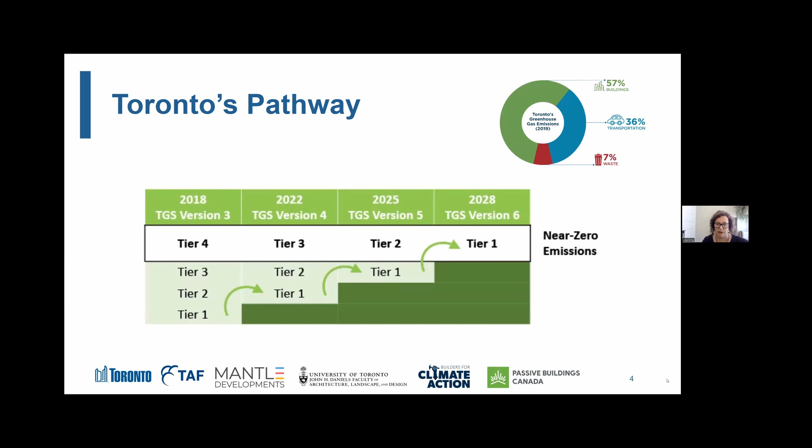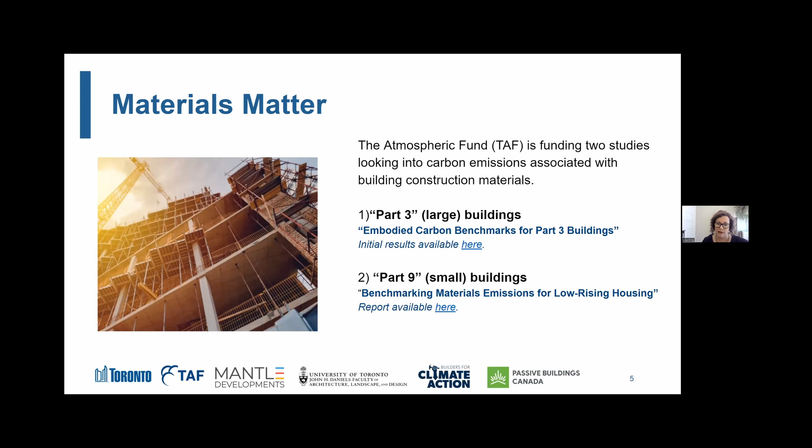And we want to really hear from you today on what you hear, first of all, in the presentations, any of your reactions to that, what you think might be some of the key challenges. But the idea is that we work towards a primer. What's being called a policy primer is a deliverable for the large building study by July. And that's something that the consultants are just getting started on right now. And all of this workshop feedback is feeding into that document so that it can be really useful for all GTHA municipalities in trying to address this issue as part of their climate change plans.

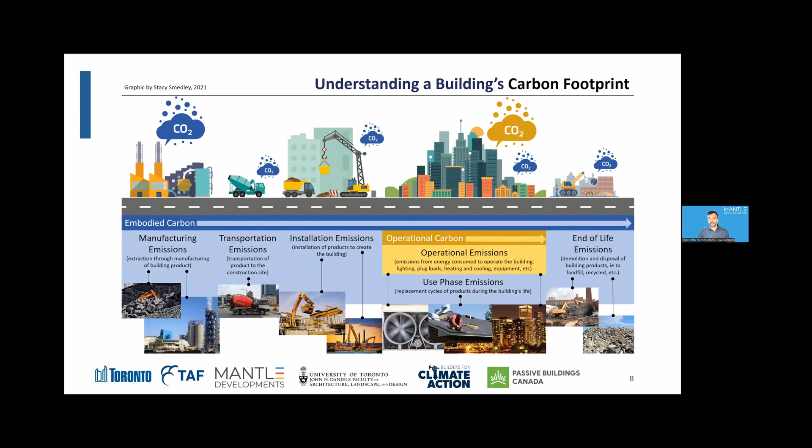And all of this is calculated using something called a life cycle assessment, or an LCA. That's the approach that is taken to do this type of analysis. So you might hear those terms interchangeably, but LCA is really the methodology, the approach, and embodied carbon or embodied emissions is the output of that study.

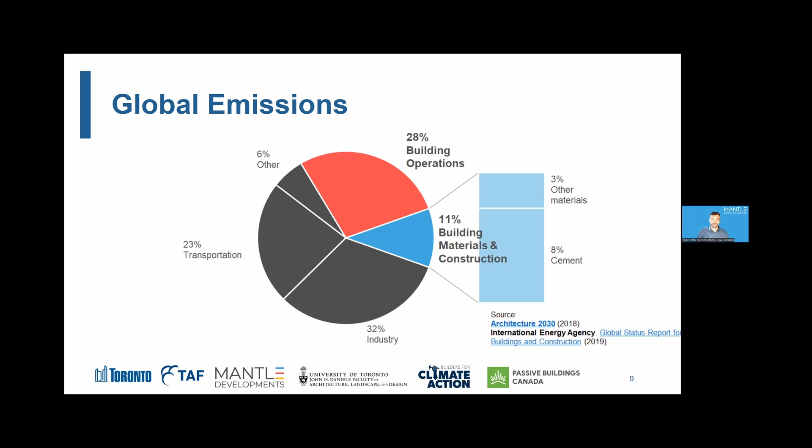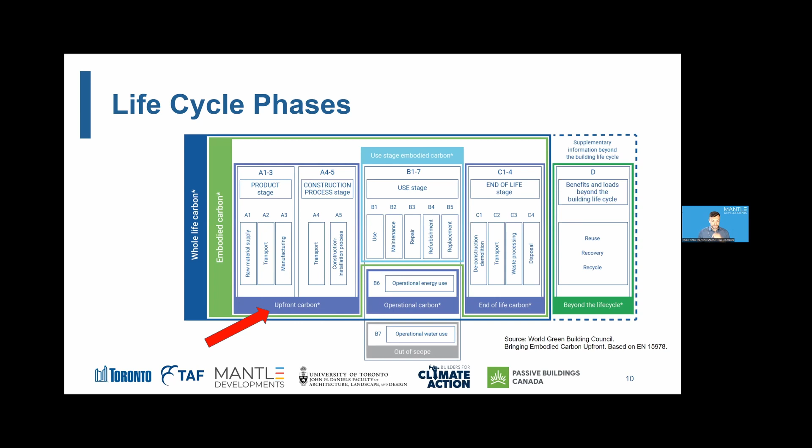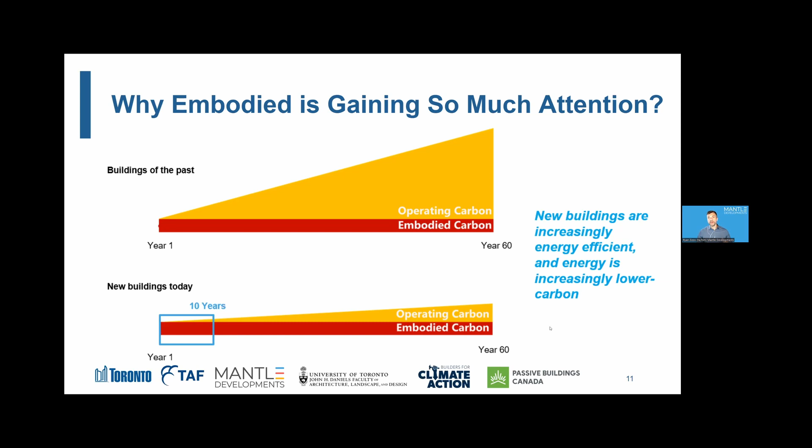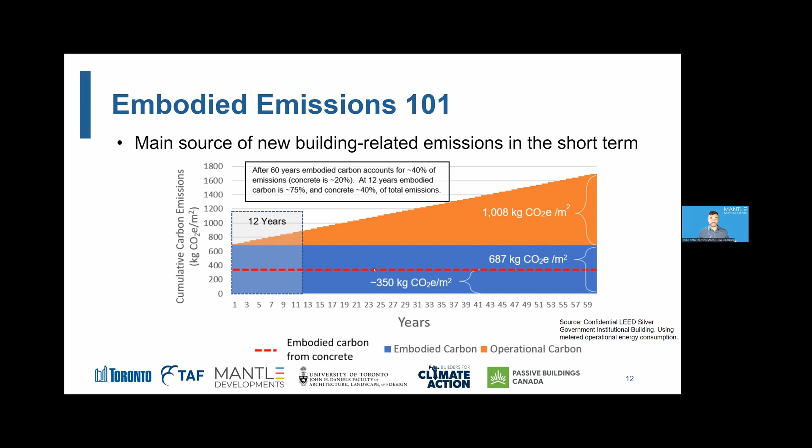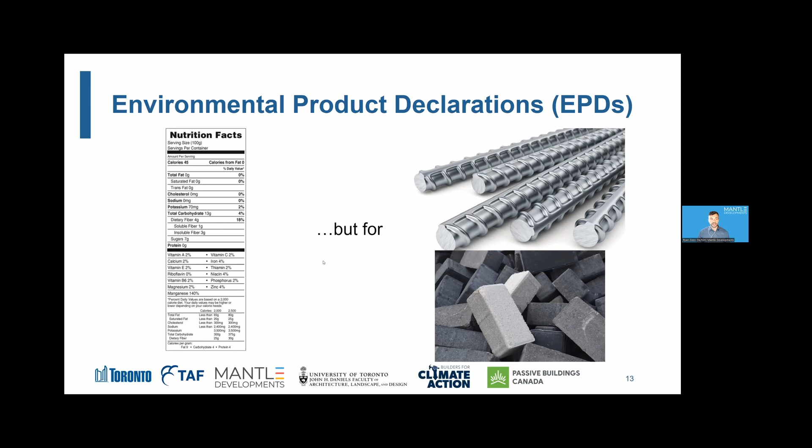So the first thing that we want to start doing to manage this is to ask for better data. What's the carbon footprint of your building material? And a way to do this is by asking for something called an environmental product declaration, or an EPD. I like to think of this as a nutritional label for construction materials. When we go to the store, it's actually illegal to sell something that someone's going to eat if you don't tell them what's in it, if we don't have proper disclosure documentation. So why aren't we having that same logic when we talk about the materials that we're producing and putting things into the atmosphere with?

So just like a nutritional label, an EPD has a whole bunch of data that you might not need to look at every little piece of. And sometimes it can be overwhelming with all the numbers in the document. But there's typically a few key things you want to look at. One would be the declared unit. On a nutritional label, we call that a serving size. So on this example from a rebar EPD, these results are per metric ton of rebar.

And maybe we want to optimize for fat or cholesterol or whatever the one or two key things we want to look for. On the label, maybe it's fat. On our EPD, it's global warming potential, or it might say GWP, which is just an acronym for that. And that's really the same thing as embodied carbon. There's a lot of different terms for the similar thing, because this is an industry that is still not super consistent, unfortunately, but this is one of the reasons why we're hoping you learn some of these new terminologies and acronyms today.

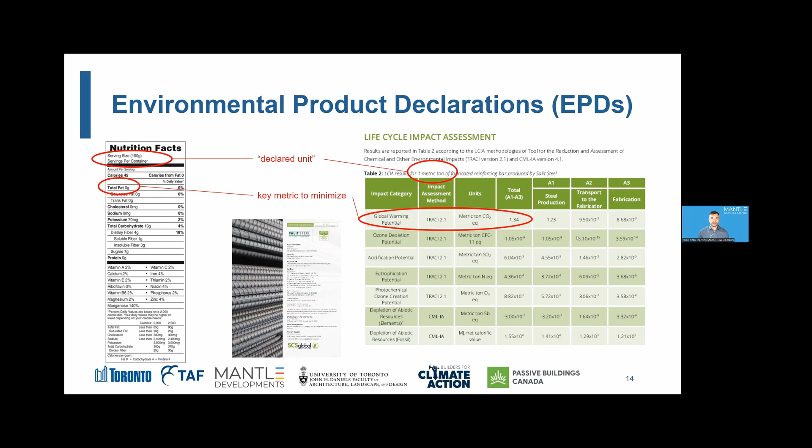So in your EPD, look for the GWP, the global warming potential, and you can see here the A1 to A3 is also reported, which we talked about earlier. These are the different life cycle phases. So one thing to really drive home is that there's different types of EPDs, or different scopes or scales of EPDs. It's very common to have some EPDs that are done at the industry average level. We call this a generic or an industry average EPD.

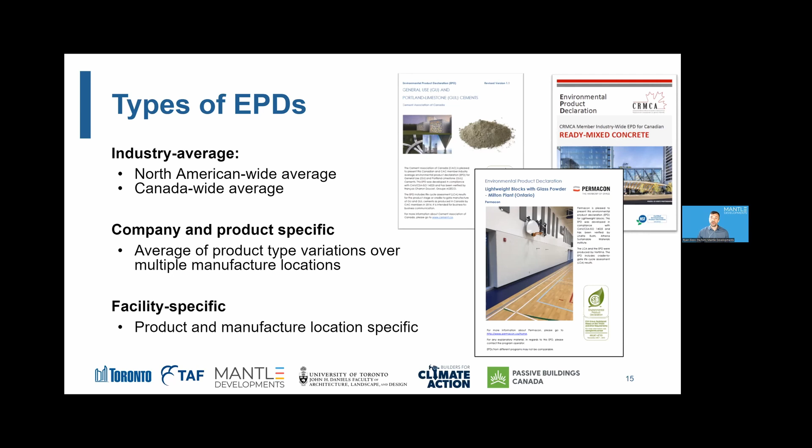There's a whole host of other policies in the US and globally, but the key thing I'll mention is what's called buy clean. That's kind of the terminology that's been sticking south of the border. And there's examples like Buy Clean California, and other states have buy clean policies of their own, which is really about limiting purchase of the state. When the state is doing procurement, they need to buy materials that are a low carbon version of the material. And there is a motion both north and south of the border to have federal buy clean policies being rolled out.

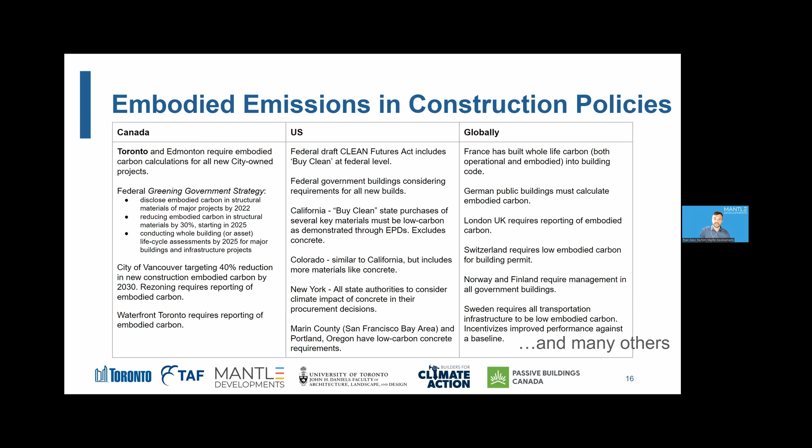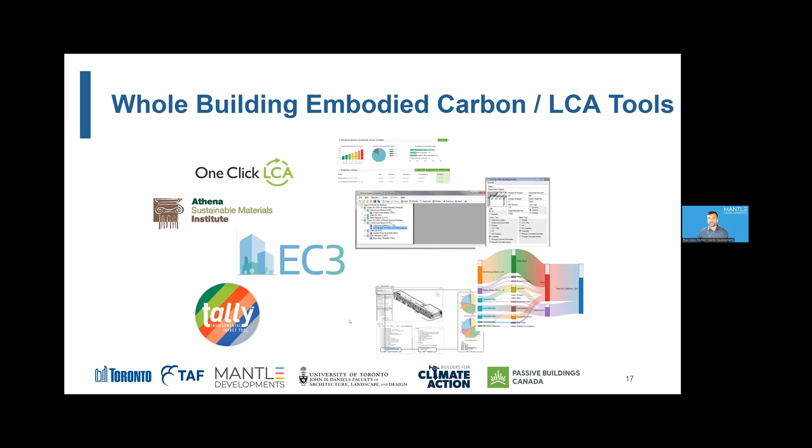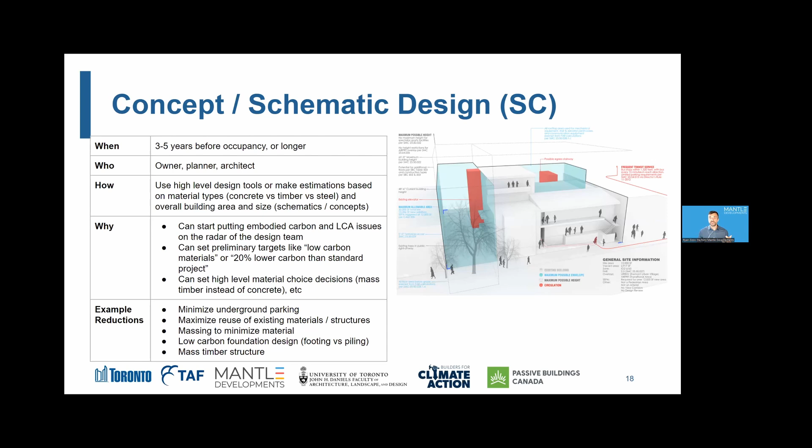And I wanted to just quickly have a few slides here to show that this assessment is not a one and done thing. This is really part of the design process that needs to be integrated throughout design, because there's different solutions and information that we gather at each phase. So at schematic design, we can think about things like reducing the underground parking. What's the massing going to be, and what's the major material type going to be? Is this going to be a wood building or a concrete building or a steel building? These are the decisions that if we wait past schematic design, it's too late to inform them.

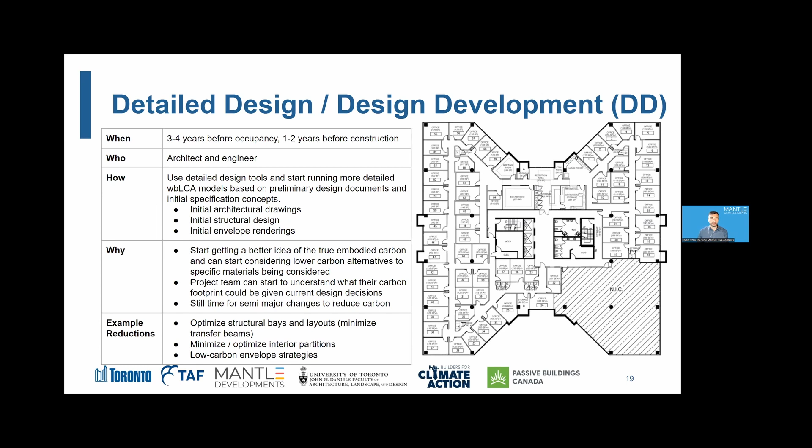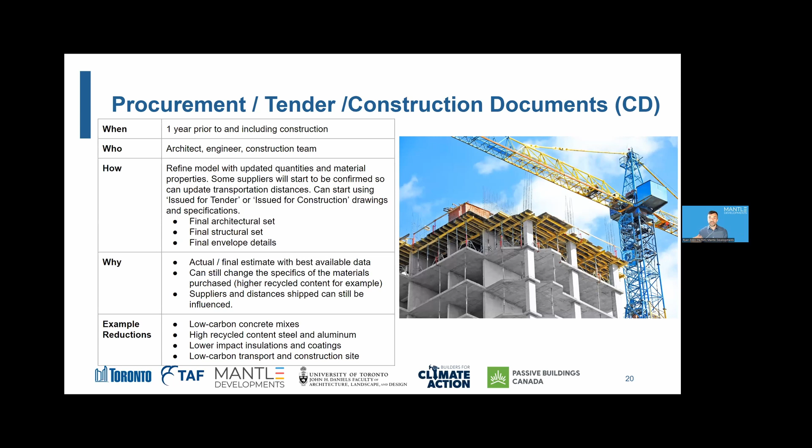When we get into the detailed design and design development, we can have a more robust understanding of the layouts and the walls and the partitions, and doing optimizations that are much more granular than we could have done at the previous stage at schematic. And then when we get into procurement and construction, this is where we start thinking about the material properties themselves. So what type of a concrete? What are the ingredients in it? What type of a steel product? Where are the suppliers? Where are we shipping it from? So as you can see, that's not something we could answer at schematic, but it's definitely something that we would need to understand if we want to minimize our carbon fully.

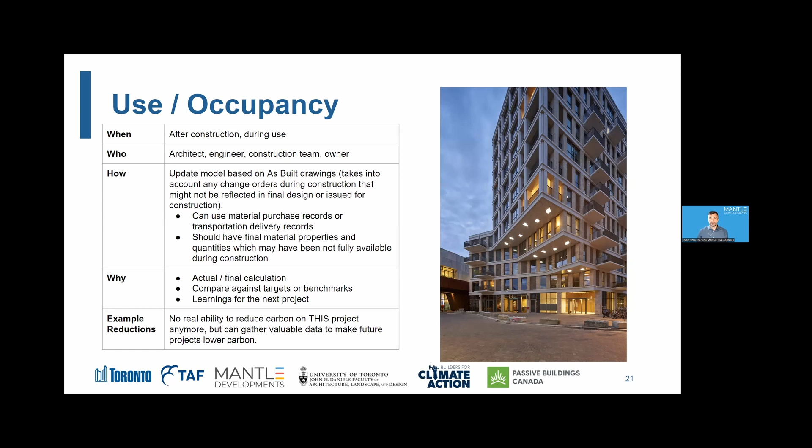And then finally, at the end of life of a building, once construction is done, during the use of the building, we can update our model for a final as-built assessment, because as everyone on this call knows, there's often many change orders throughout the construction process, and the issued for construction drawings aren't really indicative of the final result. So if we want to have a true final value, we can do it at use or at post-construction, and we can even use that value we calculate to go and purchase carbon offsets or removals to claim a truly net zero building.

So a few real quick best practices. Number one is just to ask your suppliers, is there a lower carbon option? What is the carbon footprint? Do you have an EPD? These are the questions we need to start asking on every project.

We found that the tallest buildings actually have a higher intensity of embodied carbon due to additional underground structure and foundations. In terms of material-specific solutions for concrete, there's a few things we can do. One is use Portland limestone cement, which is a 10% lower carbon impact. It's been approved by all the regulators in Canada. It's cost neutral. It doesn't impact your schedule. So it's really one of those no-brainers that everyone should be using Portland limestone cement by default.

We also want to maximize our SCMs. Most mixes have around 5 to 10% SCMs. We can push that significantly higher, closer to 30 or 40%. Definitely want to talk to your concrete supplier and your structural engineers about this, but tell them let's optimize, let's maximize our SCMs to reduce our carbon footprint.

And then finally, we can put longer curing times for elements that don't require early strength. Elements that require early strength are suspended slabs and beams. Basically, all the other concrete in our building, we don't need 28-day curing time. Slab on grade, walls, foundations, columns, which is probably the majority of the concrete in your building, it can cure in 56 days. It can reach its strength, or even 91 days for some of the elements, which allows for significantly less cement to be used and a significant reduction in the carbon footprint.

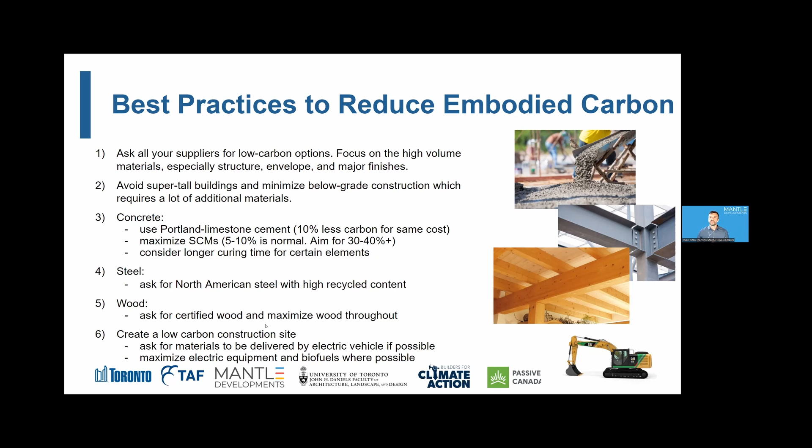For steel, we want to ask for North American steel with high recycled content. For wood, we want to ask it to be from a certified forest, to make sure that there is replanting going on and there's proper reforestation and ecosystem management. And in terms of the construction site itself, we can use electric vehicle delivery where possible. We can have biofuels. There's examples in Europe of zero carbon construction sites where instead of using diesel, they're requiring equipment that plugs into the low carbon grid, which we're able to use in Ontario. So there's a lot we can do across the entire value chain.

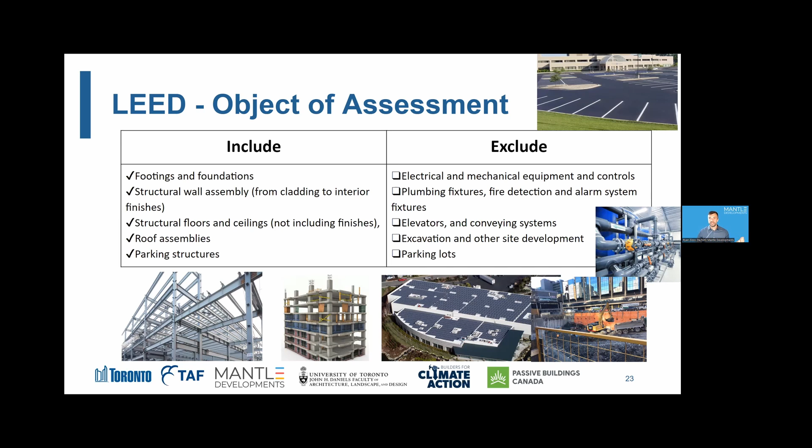Finally, I just wanted to mention that even though embodied carbon is a new area and it gives us a much broader look at the carbon footprint of our buildings, most embodied carbon or LCA assessments, if they're following the LEED approach, which most people are, don't actually include everything of a building. It includes the structure, the footings and the envelope. It doesn't include things like mechanical, electrical, elevators, parking lots, excavation. So even if you are looking at a life cycle assessment of the building, it's probably not the full carbon picture. It's probably the majority of the carbon, but there's more we need to do as an industry to ask for better data and be more holistic in the future and have a full picture of our carbon.

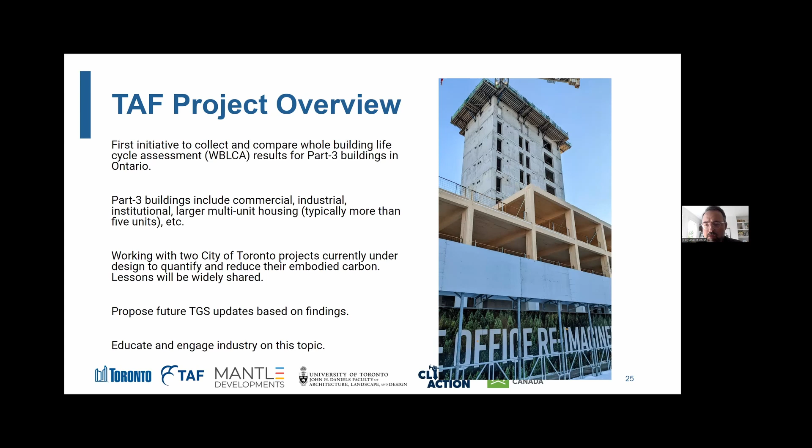Beyond this, I think the bigger picture here is how to educate and engage the industry on this issue. So this workshop and some of the work we've been doing is trying to get everybody thinking about this and, frankly, making it a part of everyday practice. Next slide, please. So here are the findings we had. We have 52 projects that came back. 15 were from my research studio at the University of Toronto.

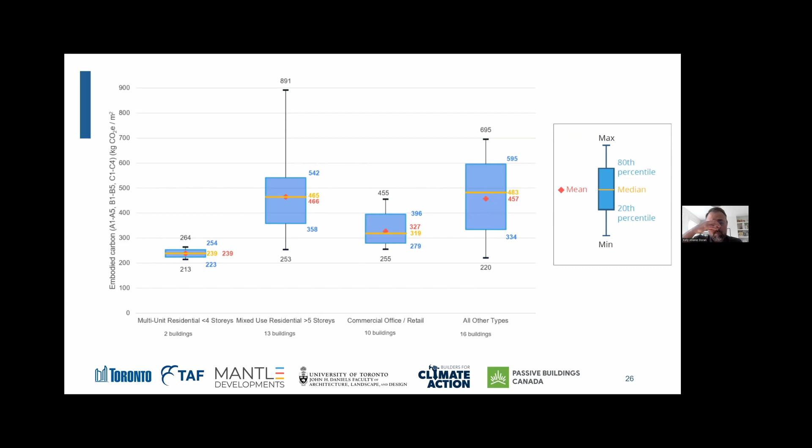The majority of this life cycle emission, as outlined just now by Ryan, is upfront. It's the cradle to gate emissions. It's all about how we're sourcing and making our construction materials. You can see even in construction sites that aren't fully electrified, very little of the emissions are happening on site. It's really about how materials are being made, how they're being shipped across the world to Toronto, how they're being brought ultimately to the project site.

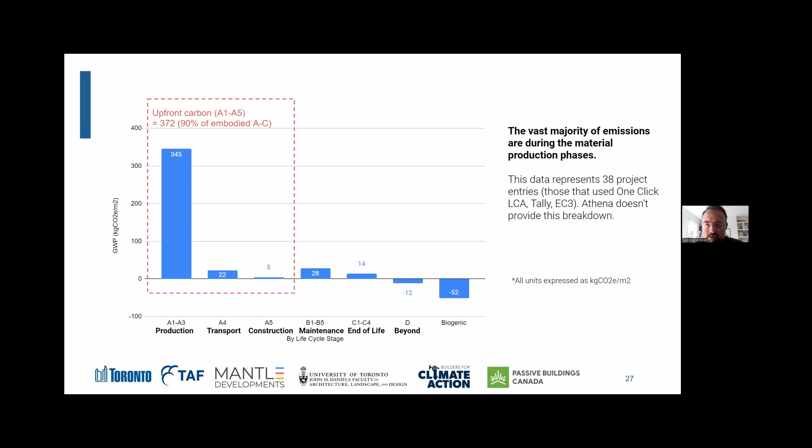Next, please. And here's where it lives in our buildings. So you can see the majority is in walls and floors, and it's easy to understand that between beams, columns, floors, and foundations, those first 3 columns are really structure, right? The vast majority is in a building structure, and then the walls are the envelope. And I think this really helps you pay attention to where reductions can be made. Like, what kind of different floor systems can we be employing, and how should we be looking at building envelopes? Next.

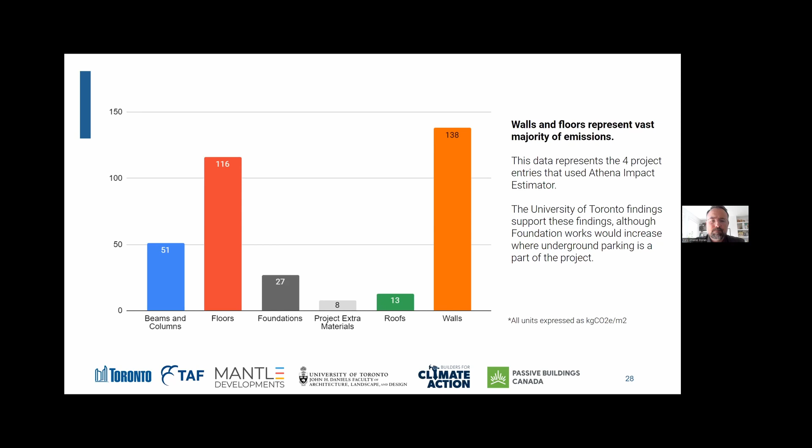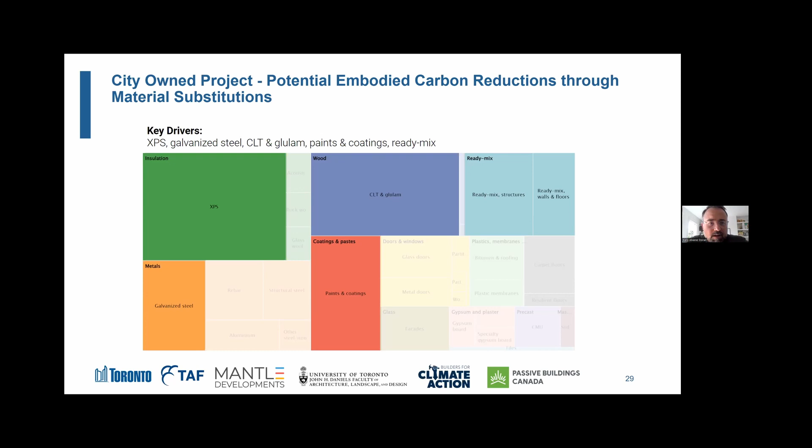And breaking down the project's emissions, this is a way to represent them as well. This is one of the city projects where you can see some of the big tickets we were asked to look at. This is the emergency services building with Diamond Schmitt Architects. Where would you make reductions? Well, you should probably start where they're greatest. So this is a representation of where there's the greatest intensity of emissions in that project. Next.

And in working with the project management team and the project architects, we went back and came back with some recommendations that were non-dimension changing, i.e. they would not affect, say, the grid and the overall layout of the project, this at the design development stage. And they were simply specification changes. We made some recommendations for a 30% reduction, and the team came back and said, we can do 5 of them. None of them are going to drive up cost, and none of them will affect the construction schedule.

So all to say, with just a couple weeks of analysis, we managed to shave a quarter of the emissions of this project, which was already low to start out, 800 tons equivalent of reductions. That's a good chunk. Per capita, I think that's about 44 years of Canadian per capita consumption. Next.

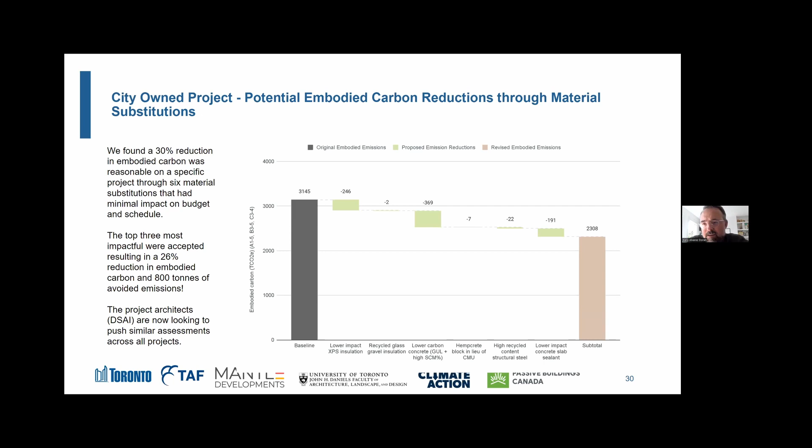So this overall way to look at this, it's not just a number, it's thinking like, what is 500? And this is part of the reason I started teaching around embodied carbon at the University of Toronto 2 years ago at the School of Architecture, to help understand where it is and what's driving it right now in contemporary Toronto architecture. So 2 years ago, I did a studio looking at multi-unit residential, where we looked at a range of recently built projects, from low rise up to a 66-story condominium.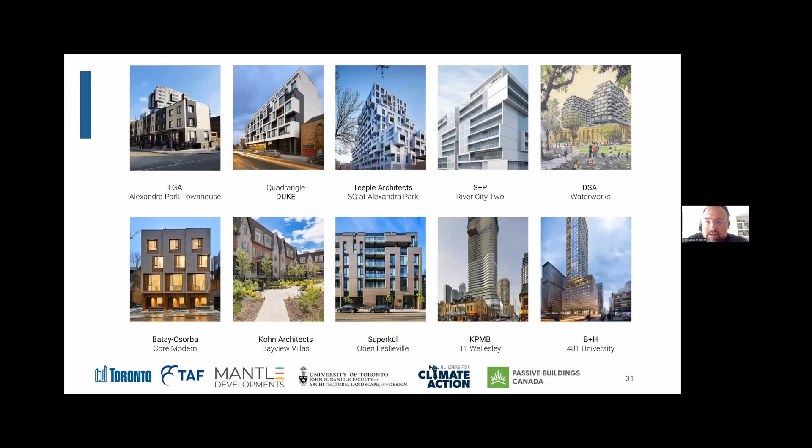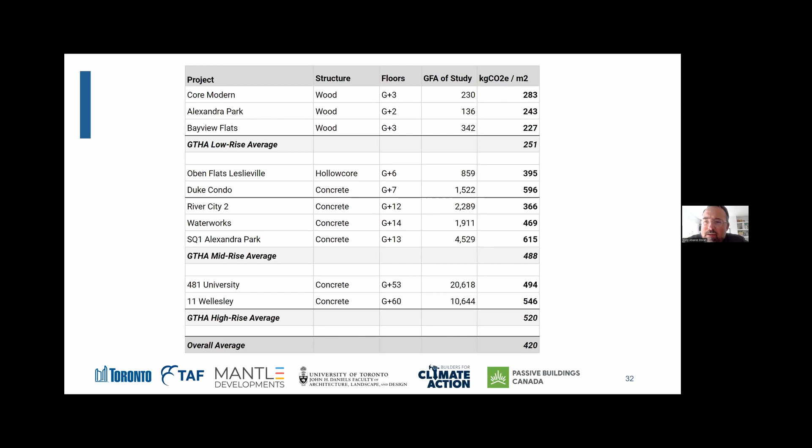Next slide. And the results from this fed into what we just saw, but just to point out here that the low rise, as you can see, is roughly half that of the mid and high rise, and that in the mid rise specifically, there's quite a bit of variation in that number. What's the difference between a project like SQ1 at Alex Park compared to River City 2? Why are they so far off, right? And where are the sources of emission?

Next. And so, for the whole industry, just to begin to understand where this is: in carbon intensive structural systems, as Ryan also just alluded to with concrete, cast in place reinforced concrete is easily the largest driver of emissions across all the projects. Low-rise projects that employed wood frame above a concrete foundation have half the embodied carbon, and the lowest carbon mid-rise projects employed steel and hollow core structural systems, a hybrid structure, which resulted in a dramatic reduction of total volume of concrete per square meter.

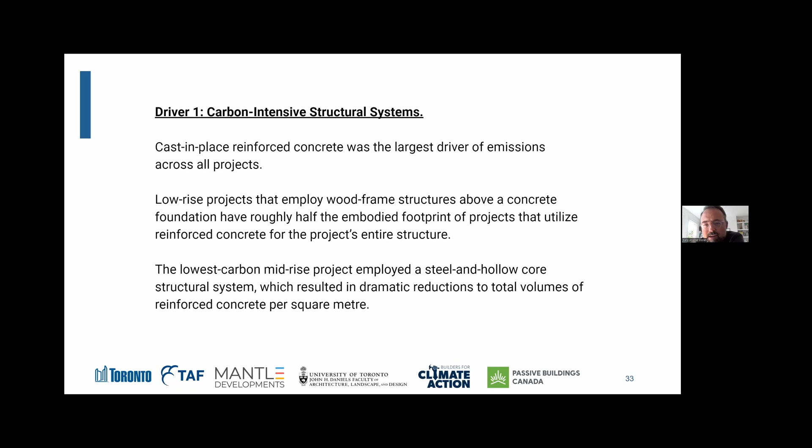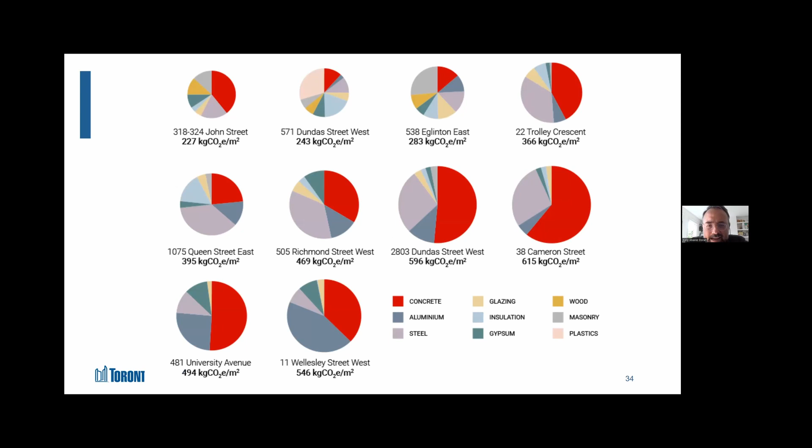Next, please. So here you can see a representation of emissions across those 10 projects, radius being total emission, and then by material family. So you can see concrete clearly is king, but right next to it is aluminum and insulation, which is the next point.

So envelopes, building envelopes. As an architect myself, I think this is where all our agency is, really. The way that we currently build and wrap our buildings is incredibly intensive. Our insulation systems that we've been using now for decades, XPS specifically, and the window systems we employ, aluminum extrusion-based systems, window wall, curtain wall, carry the highest embodied global warming potential of all the building materials in the study.

XPS insulation's extremely high global warming is attributed to its harmful blowing agents. Fortunately, this has now been regulated down, but not out of these products. It's still a big source. So whatever they tell you, it's better, but it's just better than bad. It's still not good. Aluminum sourcing and smelting is extremely energy intensive. You can imagine what it takes to make an extrusion and where that metal is ultimately mined and smelted and brought to the city. These systems inherently have a high embodied carbon as a result.

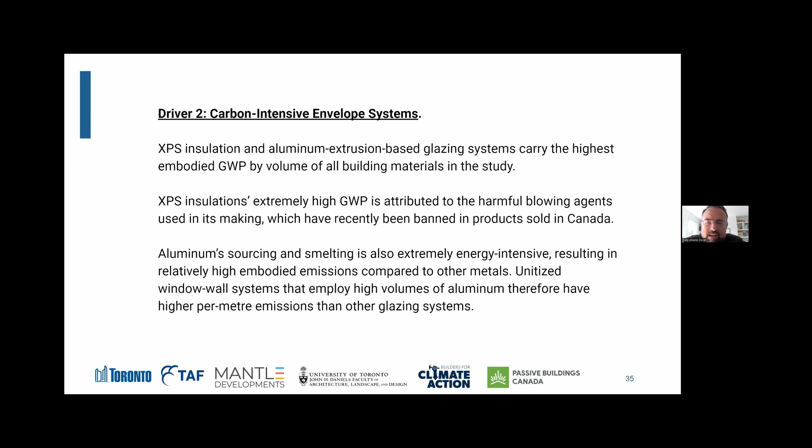Next, please. And so you can see a variety of the wall sections that we saw across projects. On the right, a standard window wall assembly, one with a spandrel panel, one without, and you can see roughly 2 times the embodied carbon per elevational square meter as some of these other brick veneer systems that you would associate with mid-rise projects compared to some of the high-rise. But certainly, I don't think we need to limit our thinking. The other kicker is when you look at the effective R value of these assemblies, those systems that have high embodied carbon are also very low performing, which is a double-edged problem. Next, please.

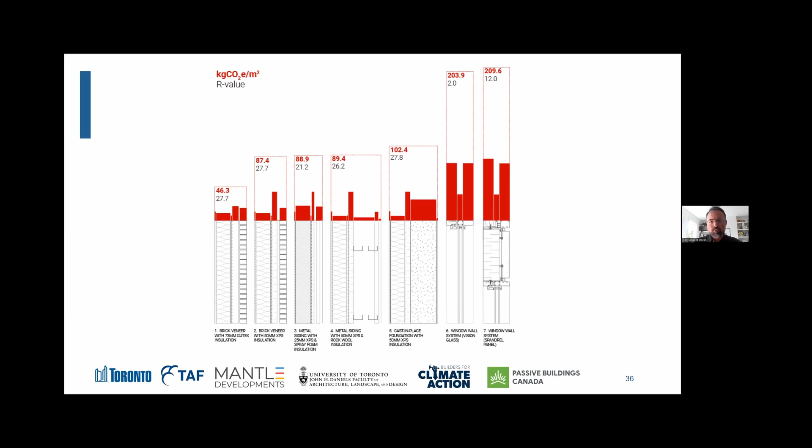Third driver is on-site parking and subgrade floor area. And I think this is where things get really interesting for everybody. Planners, architects, developers. We all know going down is expensive. Digging a big hole in the ground and filling it with cars is costly, time consuming, and it turns out incredibly intensive from an emissions perspective as well. The foundations, parking structures, below grade floor area have disproportionate impacts on embodied carbon. For these mid and high rise buildings, we had up to 50% of the total emissions below grade on a project.

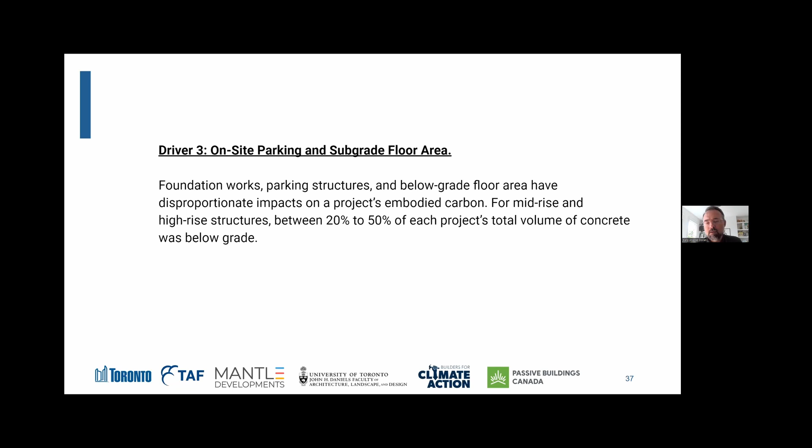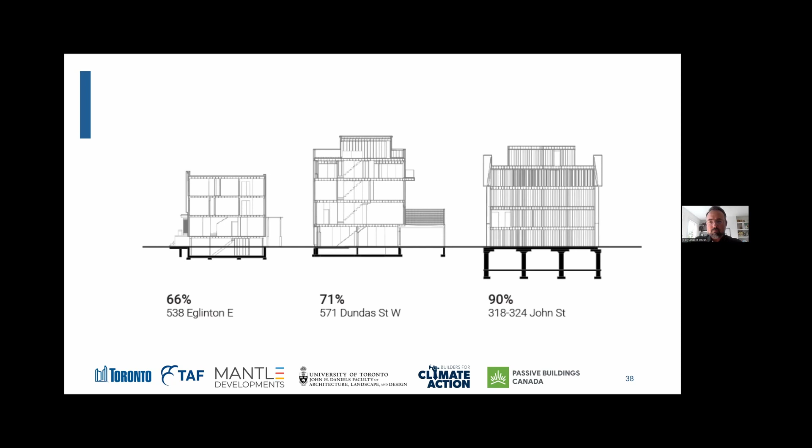And here is the view of the mid-rise and high-rise. On the left, 2803 Dundas. It's the Duke condos in the Junction, built on top of an old creek. So that foundation is basically a bathtub that's perpetually pumped out, a lot of concrete just to keep those cars dry. Right next to it is River City, where due to flood restrictions, you could not go down. So only 8%. Intelligent use of material, I would argue, not going down into the surface. Next, please.

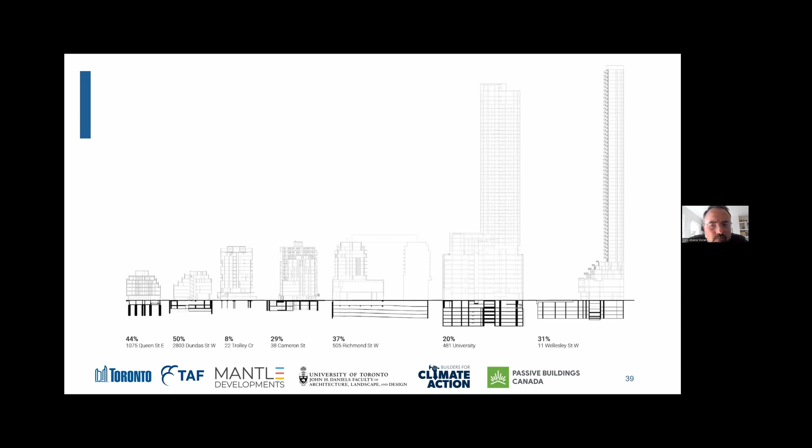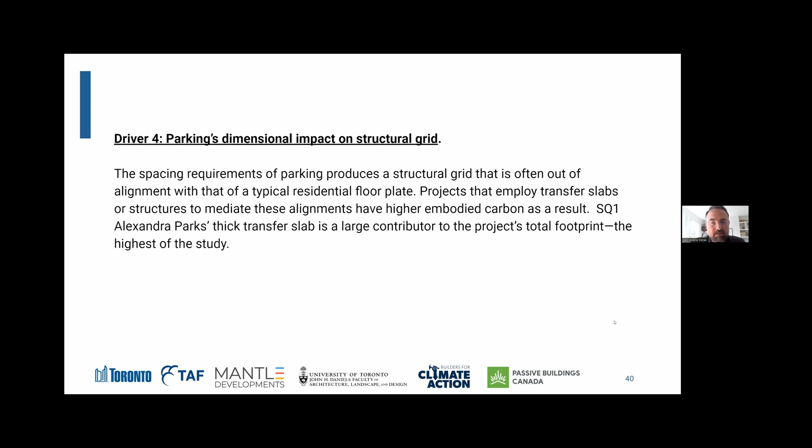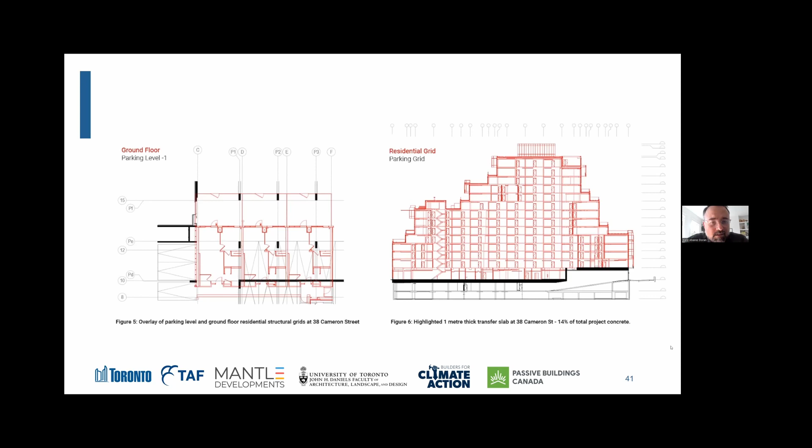Driver 4 is also the kicker on this parking: its dimensions. Even when you put the parking down beneath a residential, the grid of parking is not the same as the grid of a residential project. And to mediate these two things, you need to do some structural gymnastics through the use of transfer slabs. Next. And it's illustrated in SQ1. You can see the black is the grid of the parking and the red is the grid of residential. And the entire ground floor is a meter deep, thick concrete transfer beam, simply to house 2 floors of parking below grade. As I often say, this looks like the definition of insanity. This is clearly not the way we should be designing our buildings. Next, please.

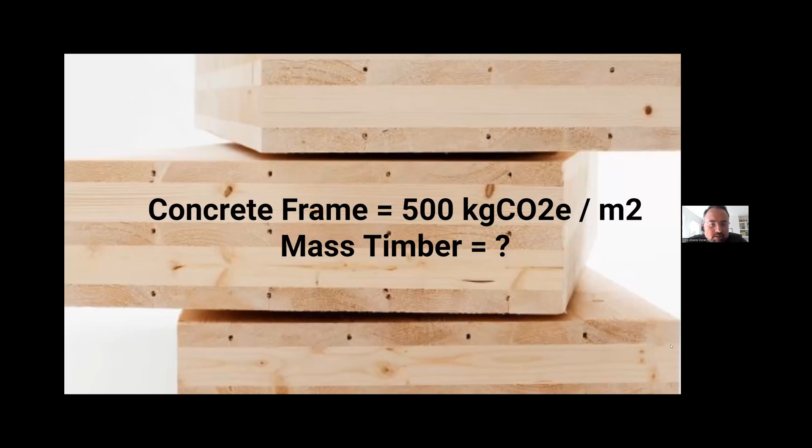And this year we looked as a kind of counterpoint. I think there's a lot of interest and promise in mass timber. So just wanted to think about, okay, concrete was 500 a meter. What's mass timber? So we, again, next slide. Went out, got a few projects from Toronto and went a bit further afield, 2 from out in the West Coast in Oregon and Washington State, 2 here in London and 2 in Sweden. Next slide.

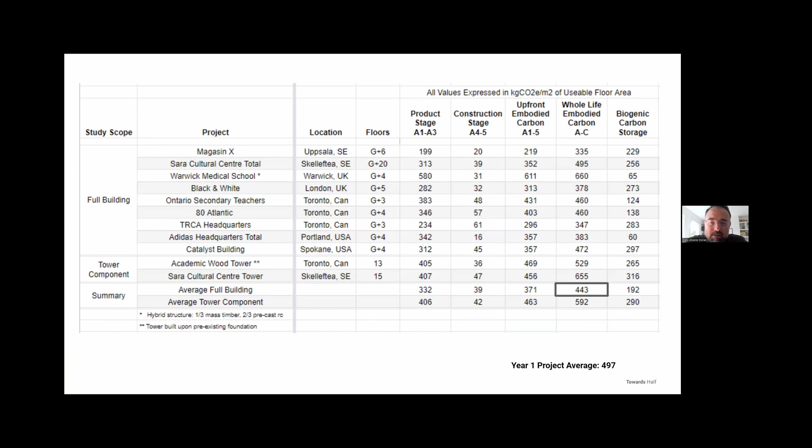And the results are kind of interesting. Again, a pretty big variety here. We had a variety of building heights, a couple towers, mostly commercial, 3-4 stories. Big variation here again in numbers, and a lot of it had to do with the envelope assembly. But on average, it was 443. So that's roughly 90% of what we looked at for the housing. Next. So that's not much better if you think about it. We're only 10% better with mass timber, and we're comparing commercial to residential, which isn't necessarily a fair comparison either.

So I think my first observation is, just from a purely embodied carbon perspective, mass timber is not the answer. But there's a big caveat. When you look at these buildings, how do you account for the biogenic storage in them? And I think this is an argument that the industry is seeking to make, that by using wood, you're locking up carbon. And so here, even in 2 projects that have the same embodied carbon, it's not quite an apples to apples comparison if you do account for that total storage, and the net are far, far off each other. Next, please.

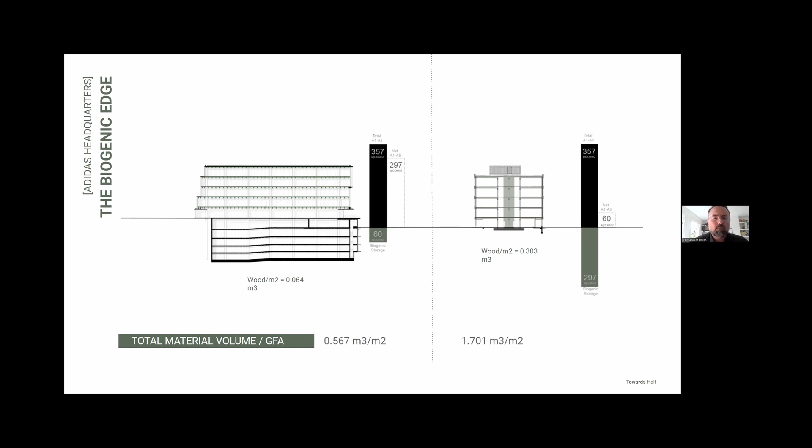Also, in thinking about wood and any material class, specifically geography really, really matters. The geography of not necessarily the travel distance, but where your material is ultimately sourced and processed. And so we were looking at the wood specifically, the Academic Wood Tower at U of T, sourcing its wood as far away as Alberta, where those projects out west, a lot closer to the forest and the sawmill, had a far less impact from their transportation on the actual embodied carbon of the project.

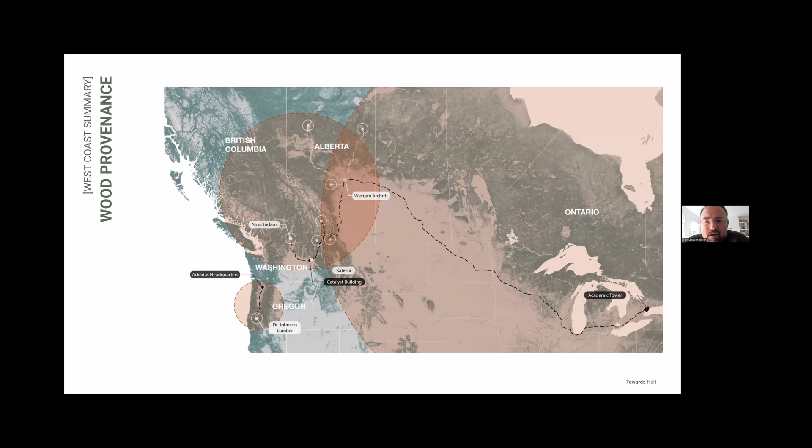Next, please. And also, it's really important to think about, if you're getting a brick or if you're getting wood or anything, the source of the ultimate production sits on a grid. I think Ryan alluded to Ontario having a very green grid. It does, until the Ford government makes it worse. But for the time being, just 2 days ago, Ontario's grid was 27 grams per kilowatt hour. Compare that to Alberta's at 413. So to say, well, if I'm sourcing wood cut and dried in Alberta versus Ontario, it's not the same tree. It's a different tree inherently at that point.

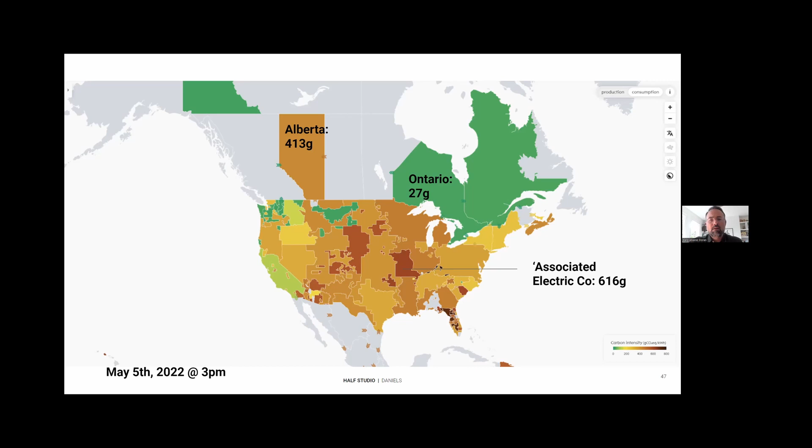Likewise, if you're getting brick from Brampton or if you're getting brick from Arkansas, one of the projects we had looked at, very, very different here. Orders of magnitude different, up to, I'm trying to do the math on the back of my envelope here, but 24 times worse, that brick from Arkansas the other day. So when you're thinking about where your materials are coming from, this information is baked into the EPDs, and why generics are not necessarily a good solution. It's really important to be specific. Next slide.

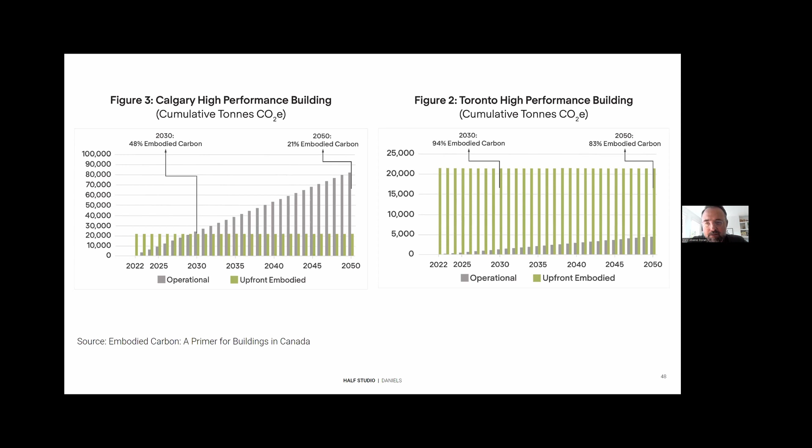And also, this is why geography matters. The time value of carbon that Ryan showed in Ontario, I'm seeing conversation around passive house here. Passive house also matters about geography. Like the argument for insulating a house, say in Alberta, is, well, it's not infinitely better. It's 20 times greater on May 5th to be doing that project in Alberta, because of the grid it sits on compared to the grid it sits on in Ontario right now. We need to be thinking about these things globally. Climate is global, and geography is fundamental if we're going to tackle this correctly.

Next. So the next steps we have now is that we're putting our recommendations together. This is the 3rd of 4 workshops, and as I mentioned, we'll be taking the feedback and feeding that into ultimately what goes forth as our suggestions for the TGS. Thank you.

Okay, I think it's over to me. Thanks for that, Kelly and Ryan and Lisa, for all that framing and background and the Part 3 study. I think it's really great that the Part 3 study that team did and the Part 9 study that our team did kind of overlapped, and it's really great to be able to have that conversation between the different scales of buildings, and essentially learn that the scope and the scale of the problem, and for sure a lot of the solutions, are shared between the different sizes of buildings.

Okay, so for our study, rather than the previous study for the Part 3 buildings, which used life cycle assessments that the various design teams from those projects performed, for this study we did that work. So our team took plan sets from GTHA developers.

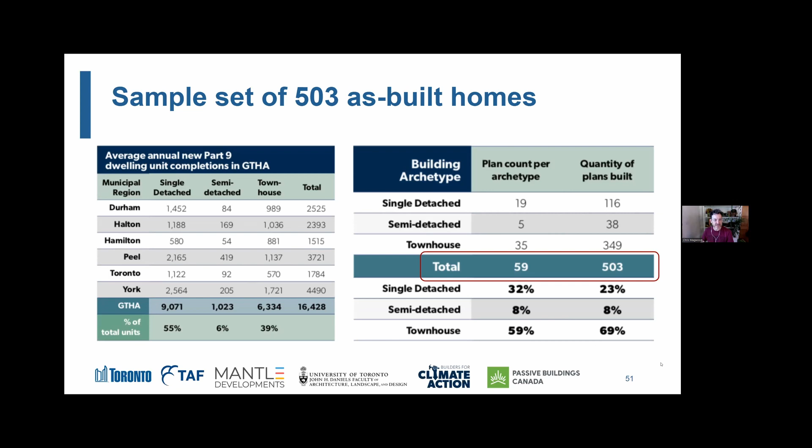So we used a tool that we developed in-house called Beam. Ryan mentioned that earlier, which for a long time has been our in-house tool, but is now available publicly. So you can use Beam for sort of low and mid-rise projects, and it's available online.

What we're looking at in Beam in particular, that terminology that everybody's been sharing, we're looking at the A1 to A3 emissions. So not the full life cycle of the building, but really deciding that that is where that lion's share of the emissions lie. When we're looking at materials, they're also the ones that have the most robust forms of measurement and the greatest data set that we could use. So we concentrate on what we call the material carbon emissions.

And for the study, a lot like what got discussed earlier, we're looking at a fair bit of the mass of the building. So we're looking at all the structural components, all the enclosure and envelope components, and all the partitions and major finishes. So flooring, ceilings, wall coverings, cladding, insulation. So all the stuff in this drawing that's sort of checked off in green.

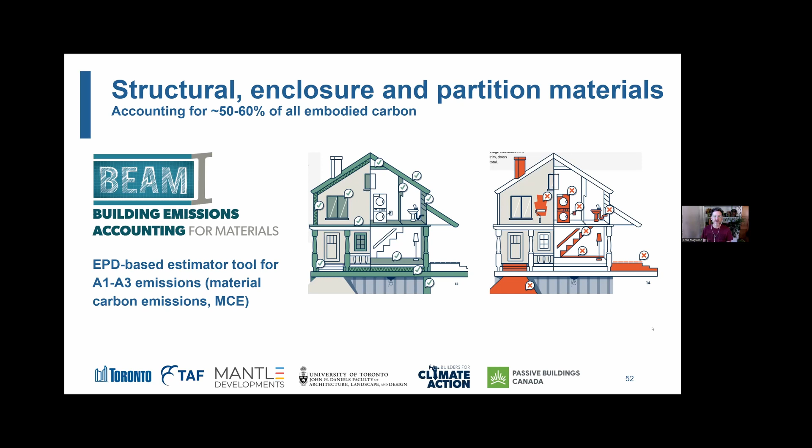But we are not looking at mechanical, electrical, or plumbing systems, appliances, millwork, surface finishes like paints, glues, adhesives, and none of the exterior work, the driveways, patios, anything like that. So a bunch of reasons for doing that. One is that the data set for all that stuff in red isn't as good, but also the materials we have chosen represent, I think, the bulk of the emissions, and also represent the places where real options exist in order to drive emissions down. And so those reasons altogether make that the focus.

So what we found overall is that there was an average of 42.9 tons of emissions associated with each house in the study. So if we looked across all the typologies, you can see on the far right there that the average is just under 43. But you can also see that by typology, there's a fairly big difference. Single detached houses are the highest with an average of 69 tons, and townhouses the lowest at 30 tons.

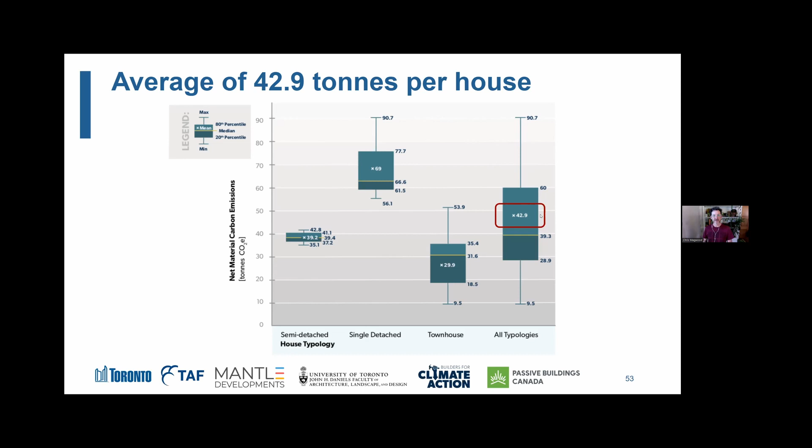And that has a lot to do with building size. The townhouses tend to be smaller, the singles are bigger, but the singles also have to wrap an entire house in an envelope, whereas townhouses have a lot of shared walls, less exterior surface area for insulation and cladding and things like that. So we can go to the next one.

We actually spend more time thinking about emissions by intensity, by area, rather than total emissions. You could see there that there was a big difference if you just looked at total emissions of single families and, say, townhouses. So we tend to translate the results into an intensity measurement, and we can do that by either heated floor area, total floor area, or habitable area. In general, we tend to really focus on the heated area comparison, because that seems like the most salient point in terms of, for the amount of carbon that's being expended, how much of that is turning into heated space.

And so you can see our average here is just over 190 kilograms of emissions per square meter of heated floor area. But you can also see that there are projects that came in quite a bit under that, and some projects that came in quite a bit higher than that.

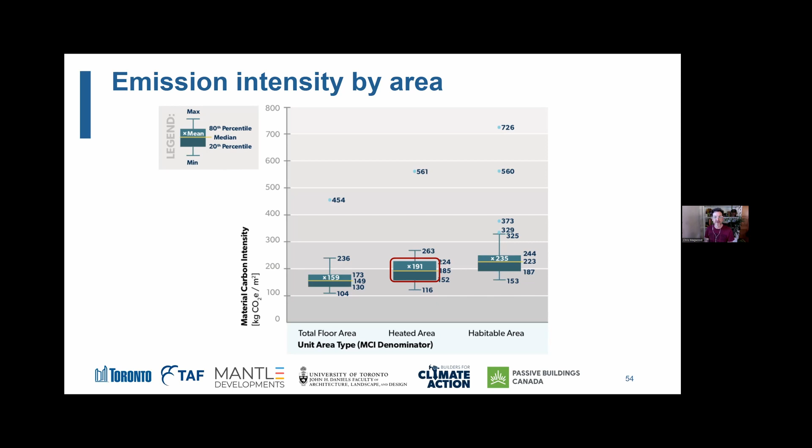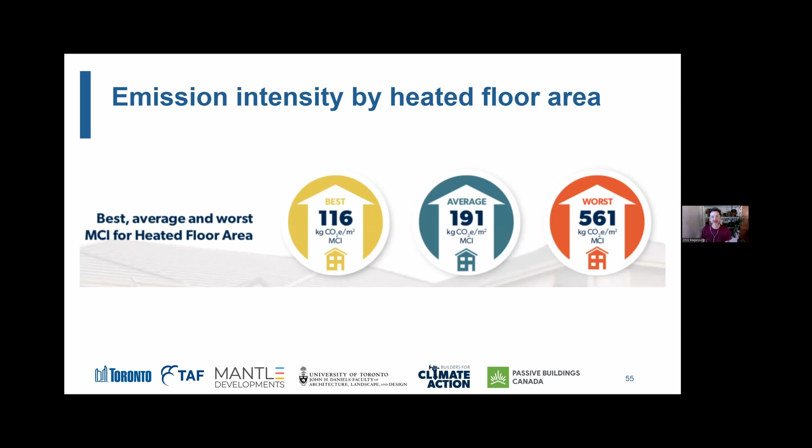Okay, next. So essentially, this visual picks up on the average, which is 191 kilograms of emissions per square meter, with that best example. And that wasn't just a single house, that was one developer. Their whole portfolio came in around that range. And at the high end, a building that was many times higher than everything else when we looked at it in intensity per square meter.

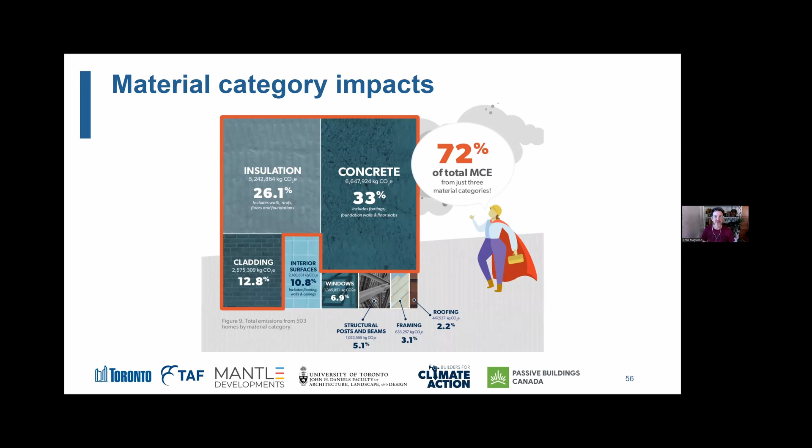Also similar to the other studies, a few categories of materials really stand out. So between concrete, insulation, and cladding, that was over 70% of the material emissions across the whole study. So if we added up all the emissions and categorize them this way, that's how it fell out. So that really just makes it obvious that if we're going to try to address this as quickly and as comprehensively as possible, that it makes sense to focus our efforts on those three high impact areas.

And in fact, this is what we did for one of the homes in the study. So we chose a home, an as-built home that was at the higher end of the spectrum. So with 262 kilograms of emissions per square meter, or a total of 81 tons. And then we applied some changes. We got what could be the best available concrete mix for that building regionally.

We swapped out a lot of the insulation materials for cellulose insulation, which is a widely available and very low carbon option. We replaced the XPS that was wrapping a lot of the buildings, and this one in particular, with a wood fiber board continuous insulation, changed the cladding from brick to an engineered wood, and changed the flooring and drywall to the best products in their category. And that resulted in a potential 75% reduction in the carbon footprint of that building.

So in the residential space, because we're not as reliant on the really high emitting categories of concrete, steel, and glass, there's actually a lot more low-hanging fruit overall in the picture of these smaller scale buildings, such that a handful of changes can make a 75% reduction.

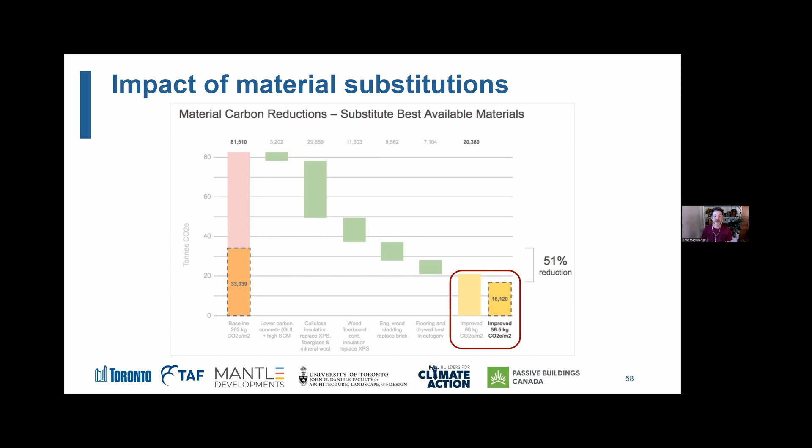So that's great. But interestingly, the two models land fairly close to each other, 56 and 66 kilograms per square meter, which sort of indicates that if we think about the changes we can make across the board to these residential buildings, we should be able to get all the residential buildings down into that sort of 50 to 60, 70 kilograms of emissions per square meter range fairly easily.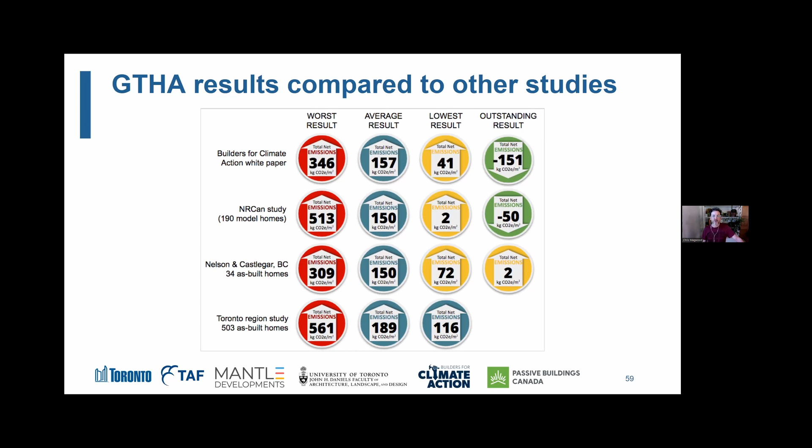We saw averages ranging from 150 to 190 in the middle. And we saw best results getting close to 0 carbon footprint, in fact, in some of the studies, and as high at the low end as 116 in Toronto. And then we saw some outstanding results that point the way to how the low-rise sector in particular could reach 0 carbon or even have net carbon storage if we pick the materials right and start using a lot more biogenic and carbon storing materials.

So I think the big takeaway for our team in this study, and I hope for people in this sector watching this presentation, is that the amount of low-hanging fruit here is really high. I think it's great to know that there was a GTHA builder who's just doing their business as usual. They were not trying to make a low carbon building. They weren't setting any goals or targets that way. Just the way they build houses, they do it profitably and repeatedly. They beat the average by 40%.

So that really points to the fact that that 40% should be a pretty easy reduction across the board, because there are builders already achieving that. And out in Nelson, similarly, the average was a bit lower there than in the GTHA. But again, there's a builder whose business as usual practice is half of what that average was.

So I think that just really points out that at least the first half of this issue, getting all our low-rise residential buildings down to 40 or 50% less than they are emitting right now, is very doable and quickly. Okay, and I think

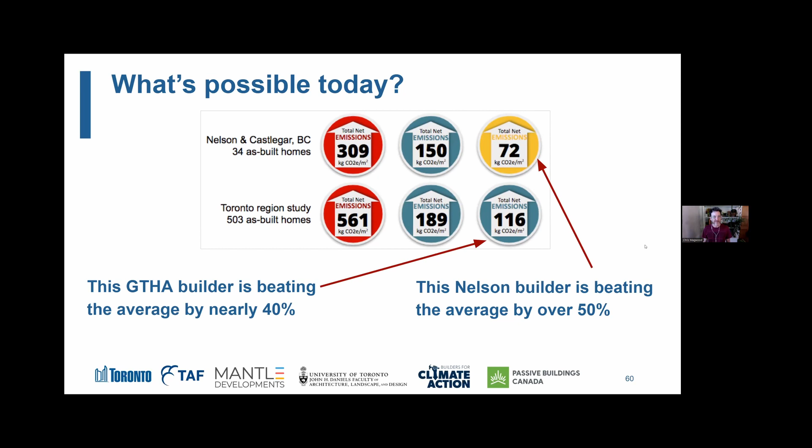so. Our key recommendations from our study, and I hope you'll check out the study. It's available as a PDF on the Builders for Climate Action website. The top recommendations were that all new home designs undertake doing these material carbon emissions calculations, and that municipalities start to ask for that report as part of the permitting process, that designers and builders request EPDs from all the manufacturers you deal with.

I think that those kinds of requests apply a lot of pressure to those companies, and the more of this data we have and the more product specific data we have, the better our measurements are, the better everybody knows what they're doing and what their emissions footprint really looks like. And then to really as an industry explore these immediate material substitutions that can buy that 20 to 50% reduction quickly and today, and then start planning out how we're going to get the other 50%.

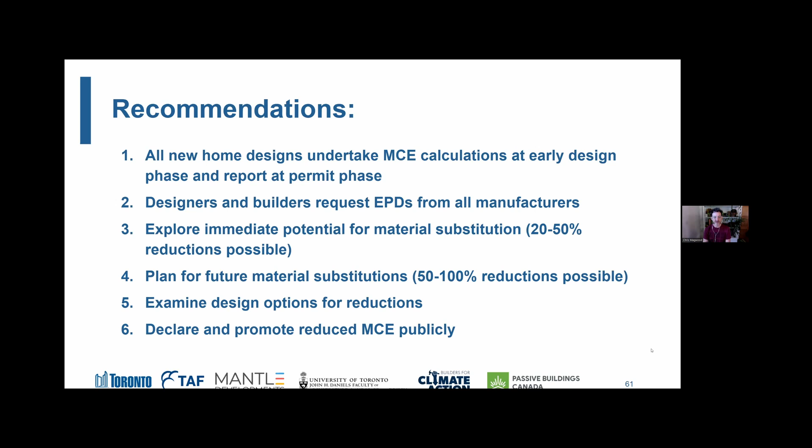If we're going to hit net zero by 2050, embodied carbon can't just be reduced, it has to be zero. So starting to make the plans for how we're going to do that over the next few decades. Our study didn't look at ways that the buildings could have been designed differently. We just worked with the as-built drawing sets that we had, but thinking about design, the Kelly study showed that the below grade space of the large buildings had a big impact. The same goes for low-rise buildings. The less of the building that's below grade and reliant on concrete, the lower you can get the carbon footprint.

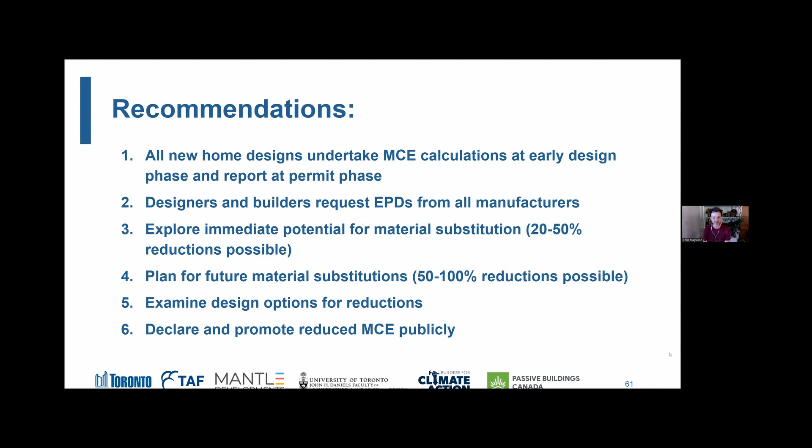And finally, we're suggesting that builders and developers in the low and mid-rise residential space declare your carbon footprint and really promote the reductions that you're making publicly. We know that a lot of Canadians really care about the climate and really want to see action taken, and that people who want to be early movers in this space will be able to benefit from identifying their house products with a greatly reduced carbon footprint. So I think that's the end of the Part 9 study, and thanks, Chris.